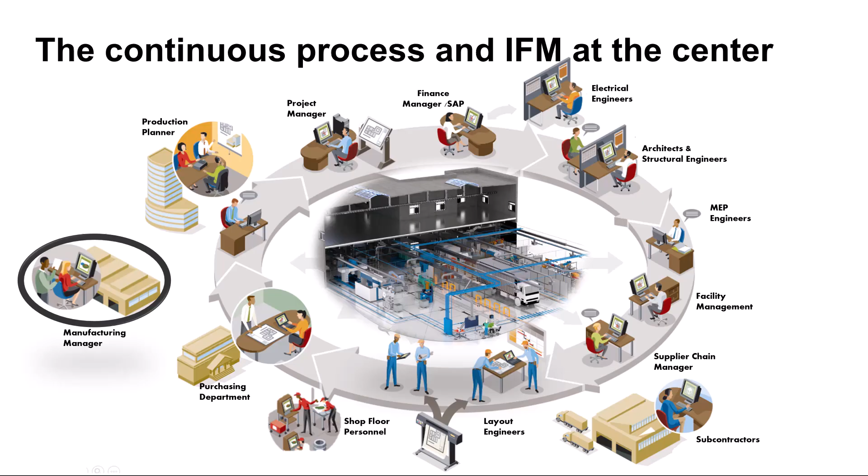Most companies work in functional silos. Little attention is paid to the company-wide flow of information. The information is hard to find, inconsistent, often outdated, and difficult to interpret. This leads to errors, delays, and inefficiencies. And most companies do not even realize how many layers of redundancy they have built into their business-as-usual processes.

In fact, Forrester research reported that we are using on average 45 different apps or services every single day. But that data is siloed, and people spend about 12 hours a week just digging or searching for data. And we can do better, a lot better. So let's have a look at the goals we have.

Our goal for an intelligent 3D and BIM process of the integrated factory is to coordinate the wide variety of different disciplines and supply everyone with the latest data. Here we can see the production planning, media supply, ventilation, lighting, water, electricity, for example, and of course the building itself, designed in different solutions, different departments, or even companies.

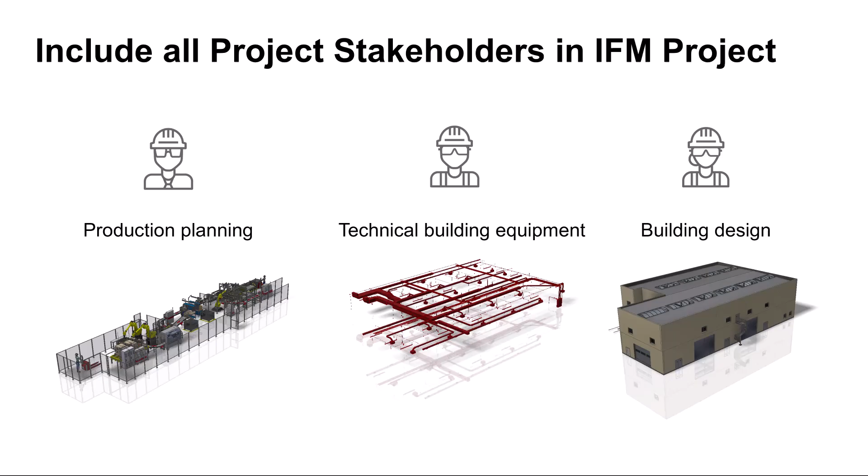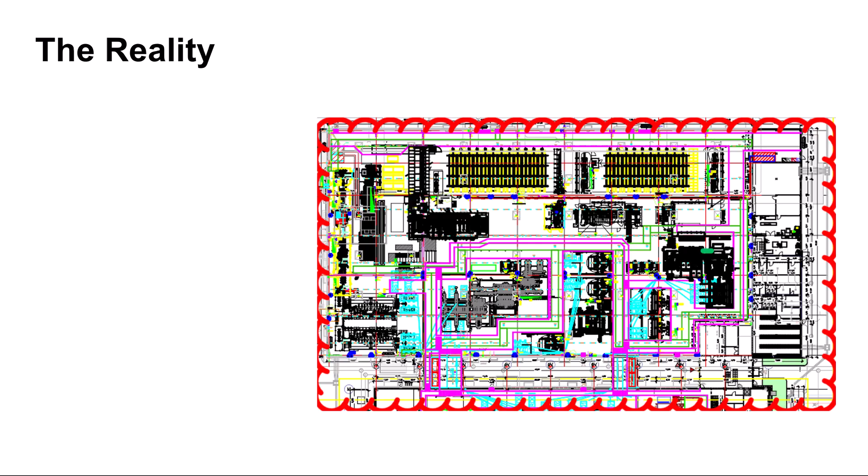But the reality in many companies is that layouts are still created in 2D. These layouts are usually readable only by professionals with a lot of experience and are error-prone because the third dimension is not included. All accompanying documents, such as Word, Excel, PDF, or handwritten documents, are distributed by mail.

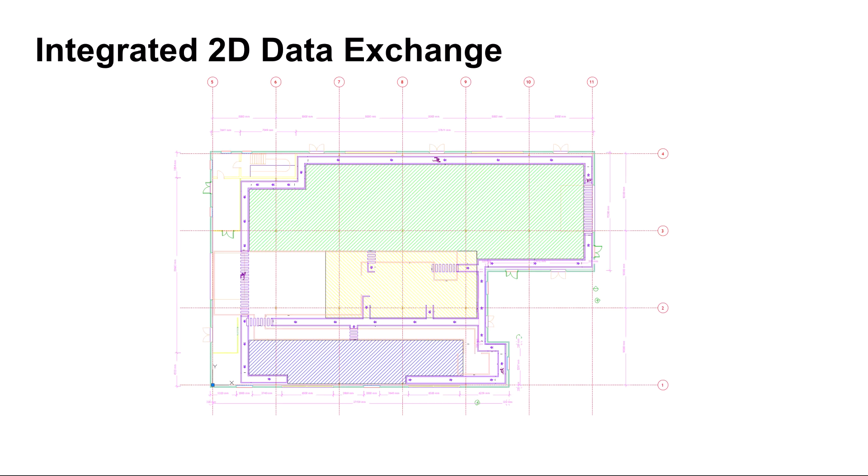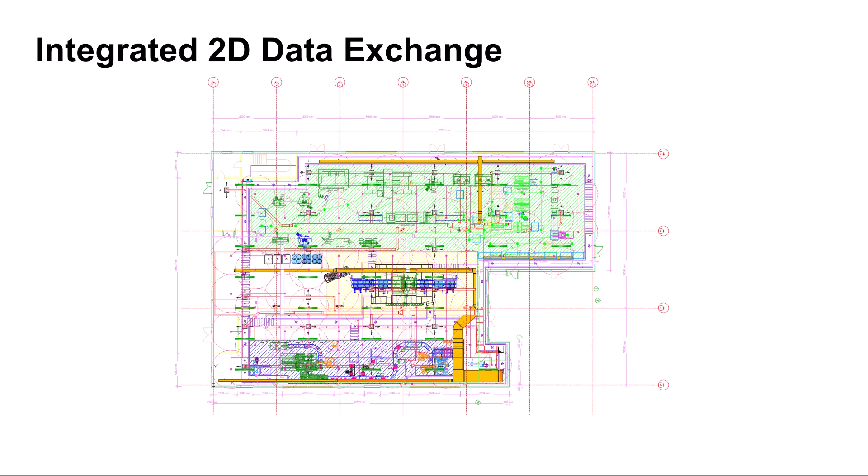And of course, we do see a data exchange here as well, with different layers, linked files, and many copies with different standards of the 2D floor plan of the building, the desired production area, the layout of the production itself, and finally the MEP design. This certainly results in a complete layout. However, the level of information and readability is limited.

So the goal is to elevate these traditional processes to the next level and beyond. As a first step, a building floor plan is certainly a good first orientation. The production areas as well as the media supply area can be represented as a 3D construction space. In this example, this is created in Revit and linked in Inventor.

The layout planners then fill the assigned areas with machines and the production layout. The model is completed with the media supply and the building from Revit.

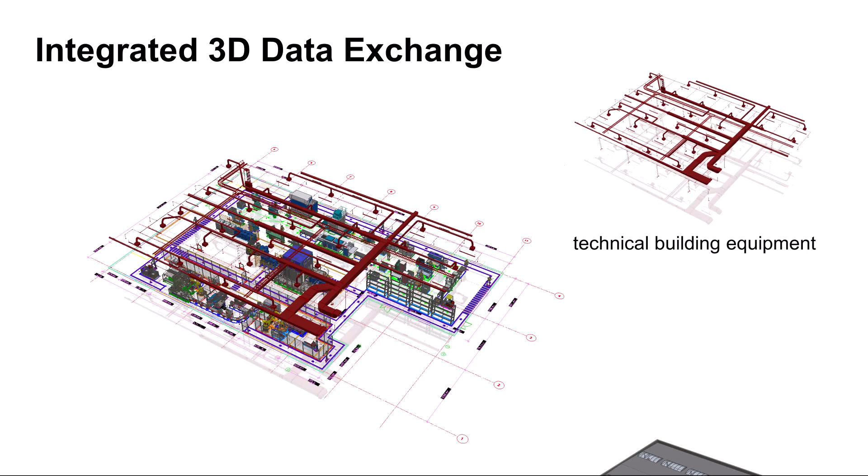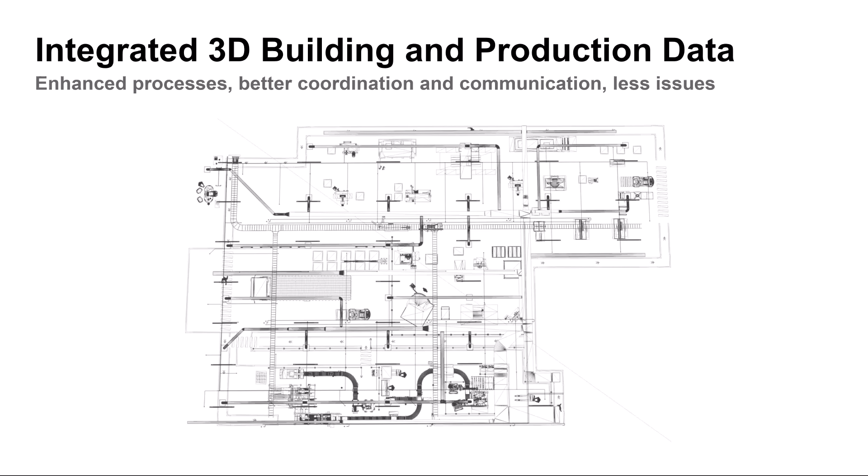This integrated 3D building and production data workflow enhances all processes for the digital factory, allows a much more intelligent coordination and communication, resulting in less issues, less time invested, and cost.

However, our goal is to use the best Autodesk solutions to solve all requirements and intelligently combine different Autodesk solutions with the least amount of data loss and the latest data exchange, collaboration and communication tools. Many products are bundled in the AEC and PDMC collections, so it's easy and affordable for our customers to use the same methods and workflows.

So now let's have a look at the Factory Design Utilities, just as a short overview, because in this case we want to concentrate on the AEC part of the digital factory, but at least I want to show what the Factory Design Utilities are. With the Factory Design Utilities, it is possible to create the layout in 2D or in 3D. And this is unique in the market.

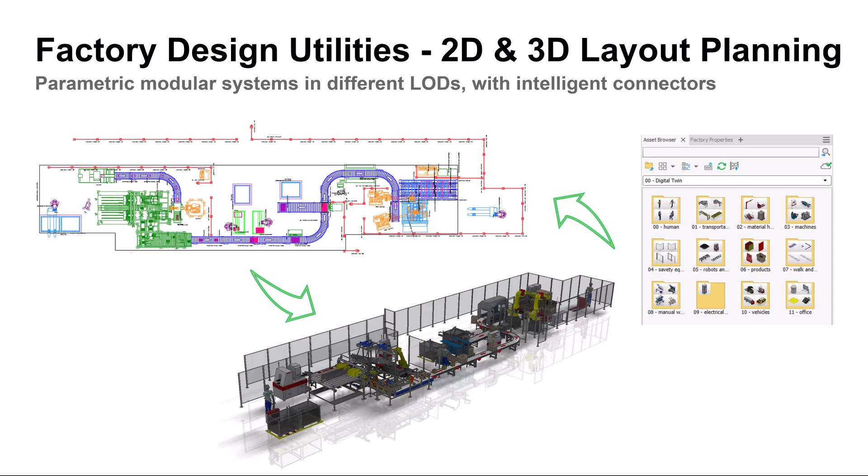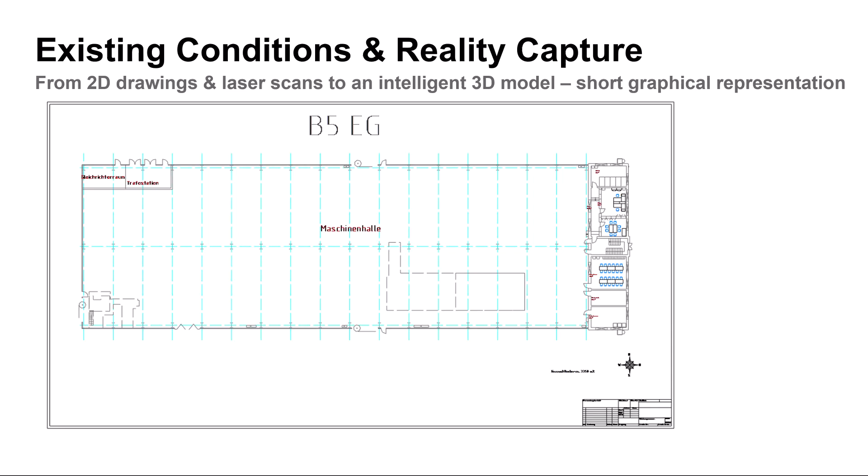So now let's have a look at the existing conditions and reality capture. In this case, we have a 2D plan, a DWG drawing, as a first step. We can use the lines and layers of that 2D plan to create intelligent grids and also walls and facades and so on, so that we can create the first floor plans, for example. But we don't have any information about the height or any other information.

But in this case, we just had a laser scan. So as you can see here, we don't really have the height, but with a laser scan, even though it doesn't have a good quality, it's just one single laser scan, at least we can see the height, the roof, the facades and so on. And that's what we can use to really create the whole 3D model in here.

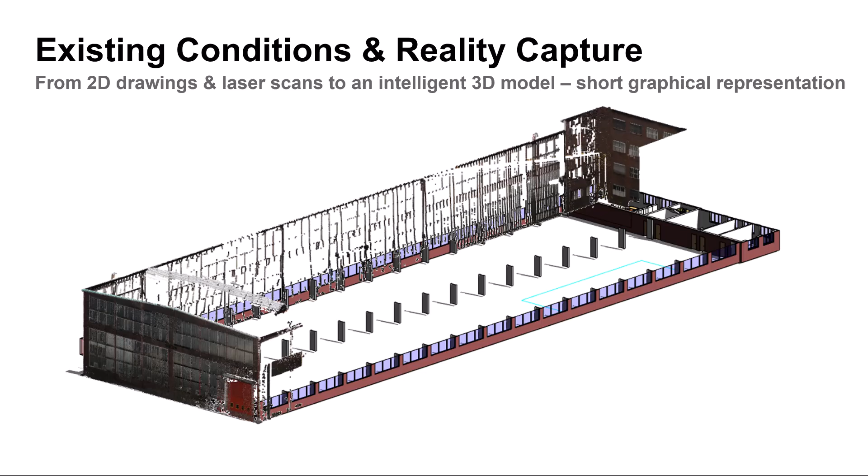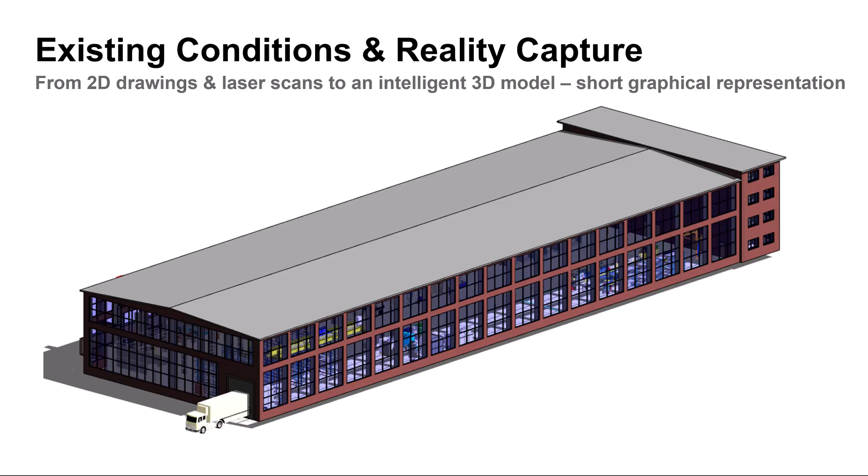And then we can fill it with more and more information, maybe use some other laser scans, maybe we have some other data that we can use to create even the MEP elements, and then we create the roof, and also we put the layout planning inside. So this is just a short graphical representation of how it could be done. So how do we integrate that building now into the different workflows, also into the production processes? There are different ways of doing it.

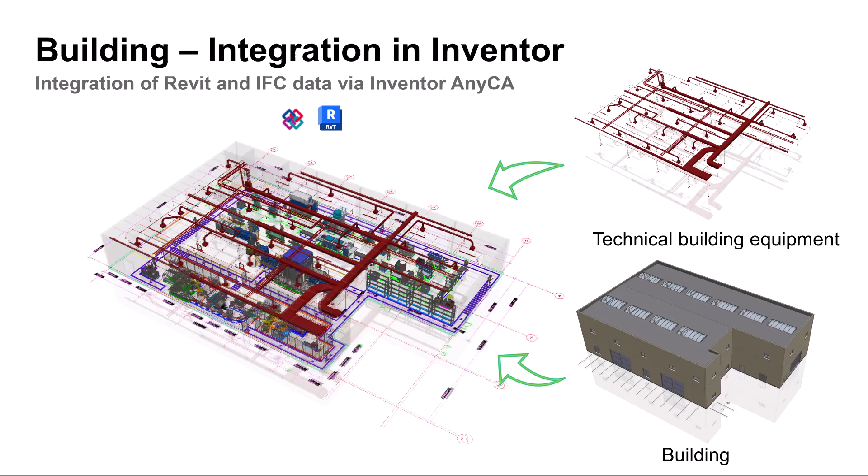The integration of building data is becoming increasingly important. It allows collisions to be detected in advance before they generate high cost on the construction site. Building data can be integrated in Inventor with Inventor AnyCAD, linking a Revit or IFC file, for example. In this case, we see the production planning, and we have the technical building equipment from Revit. So we just import that. We can link it with AnyCAD to Inventor, the technical building equipment and also the building, and then

have that building integrated. Here you can see an example with construction spaces modeled in Revit and imported or linked in Inventor. Those spaces can now be used not only to insert production machines inside available areas, but also to see limitations like available heights in a three-dimensional space out of the building. So working with a construction space can not only replace the classic DWG floor plan, it adds BIM workflows and advantages to it.

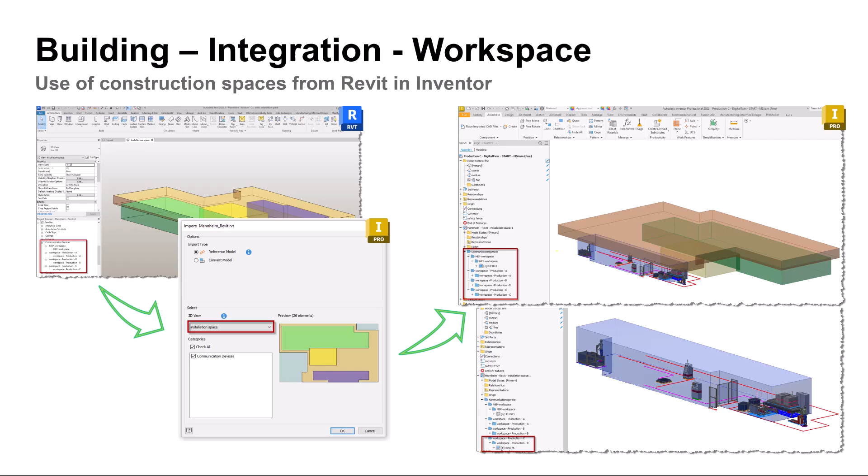In order to achieve the best possible coordination of the building, MEP objects and production layout, it is necessary to coordinate the common origin of the project. The easiest way is to use the Revit origin that can be read by Inventor and will be aligned for all further workflows. With this approach, collisions can be detected and eliminated at an early stage. In this case, you see just the spaces that we have, but of course it can be coordinated further. When we have the whole MEP elements, you can see the collision here again.

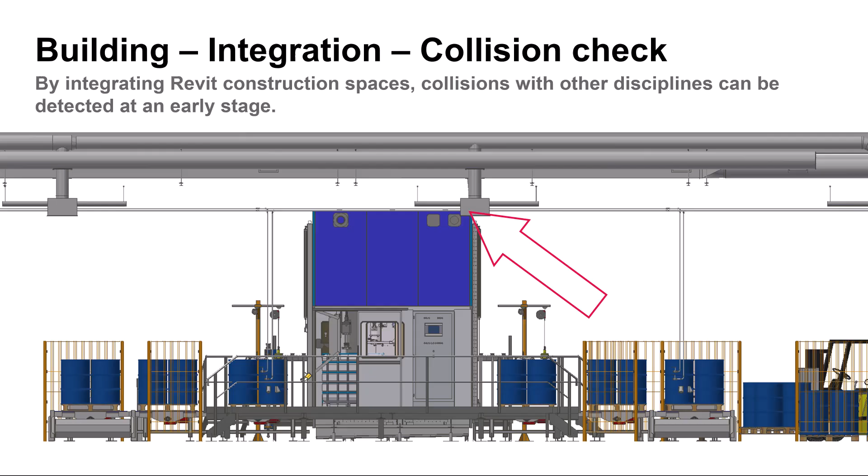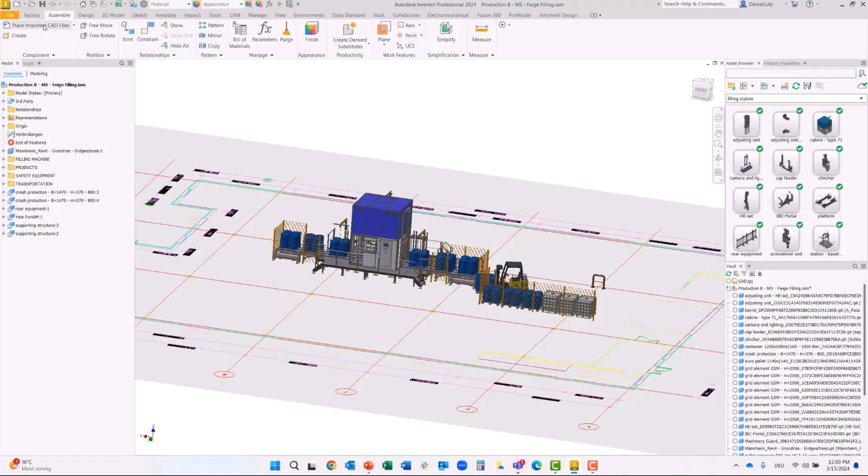So let's have a look at this video to see that live. In Revit, these construction spaces have been defined for each project stakeholder for project coordination. In a separate view, only the build spaces are visible to simplify integration with Inventor. In Inventor, we can use AnyCAD for Revit to load this view and place it at the origin.

Now you can clearly see that the cabin of the machine collides with the installation space of the MEP model, what we could see in the slide before as well.

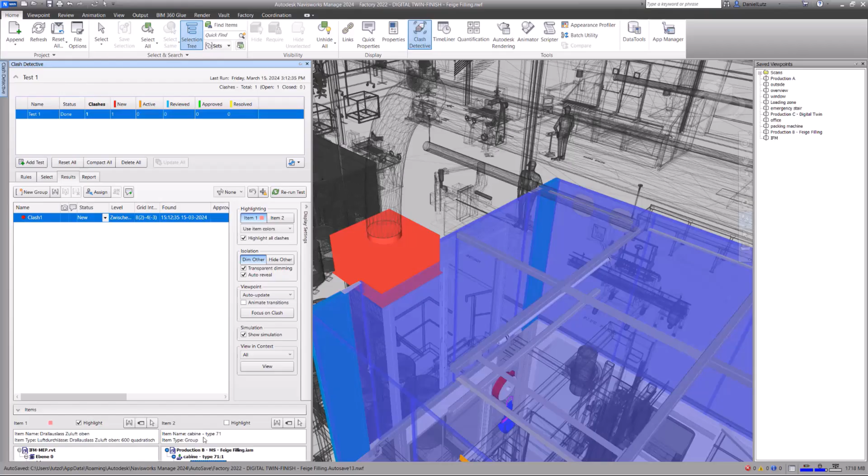And before talking about cloud collaboration, we don't want to forget about our coordination solution, Navisworks, that can perfectly integrate all of the above created objects and projects. So in Navisworks, you can easily do a walkaround, a walkthrough, and it helps to speed up the bidding and planning processes. But of course, we have the collision detection, and you can see we just found the collision with the machine and with the MEP elements in here.

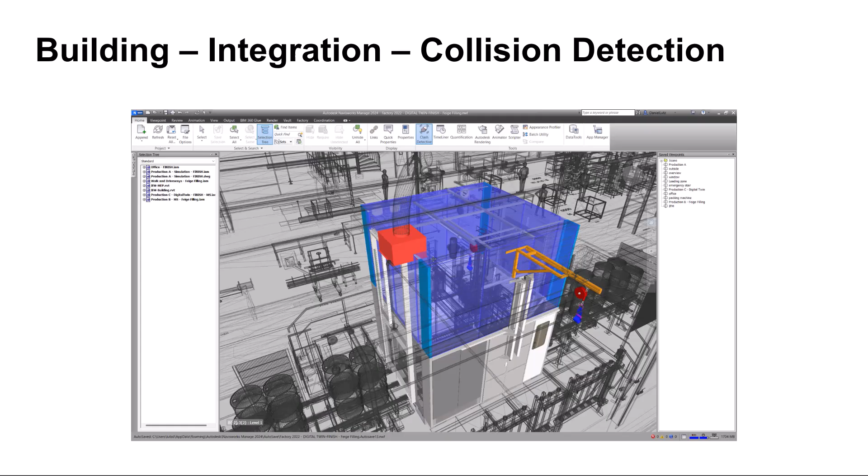Now let's have a look at the coordination and collaboration for digital factories within the cloud. In this case, we have a look at the production planning view first. So in the production planning, we want to integrate the technical building equipment and the building design. In that case, we just have an early integration of the building data into the production planning.

So we just upload the Revit files into the Construction Cloud, and from the Construction Cloud, those files can be read by Inventor or AutoCAD. And that is an easy way of using the Construction Cloud and sharing the same data in the Construction Cloud.

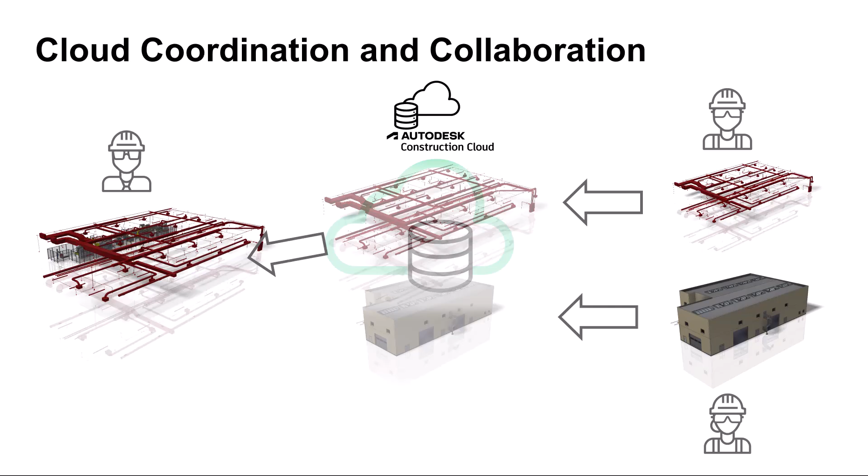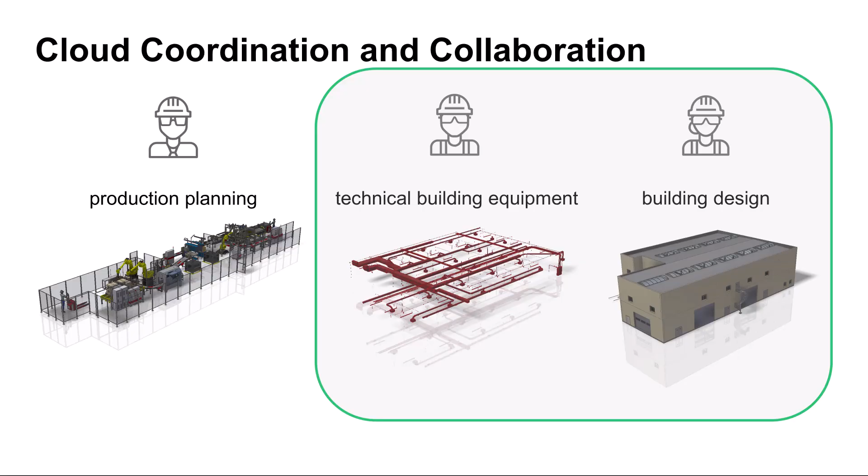On the other hand, we have a look at the building planning. So the building planning needs to integrate the production planning. So how can this be done? In this case, there's possibilities with Inventor or FDU for Inventor to export a Revit file from Inventor and then to publish that Revit file into the Construction Cloud. So in Revit, we can read that published Revit file out of Inventor and can use it in the Revit project itself to coordinate, for example, the MEP installations and so on.

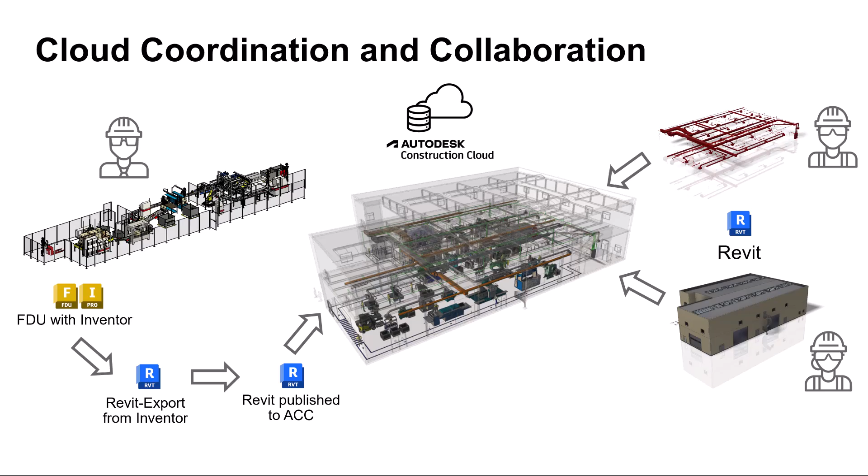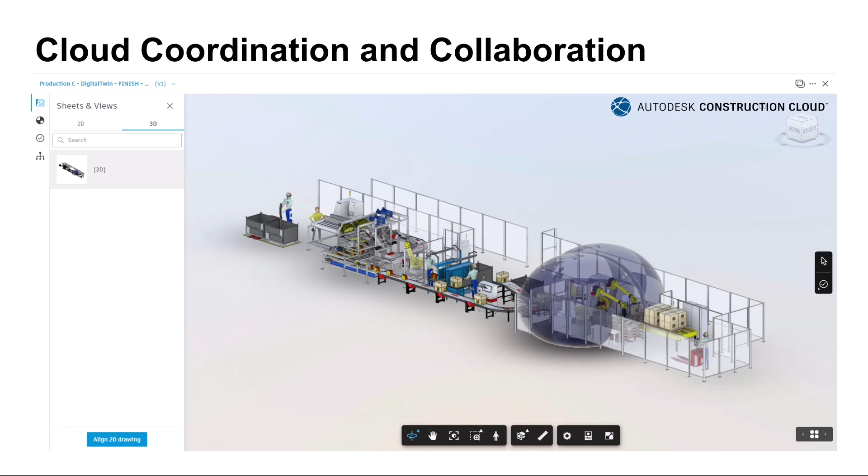Here we have a look at a project out of Inventor uploaded as a Revit project into the cloud. And these projects can now be linked into Revit and can be updated because it's just linked. And then, as you can see here as well, we also have the possibility to use those files for coordination processes. So like we've seen in Inventor, like we've seen in Navisworks, we have possibilities to do collision detection as well here in the cloud with all those different files.

Now let's have a look at another way of exchanging data. We don't want to exchange files, we want to exchange data only. And for that we have developed the Autodesk Data Exchange. With the Autodesk Data Exchange there's a possibility of exactly not sharing files, but sharing data, metadata only, so objects only, for example. So there are different connectors for a lot of different solutions, and not only Autodesk solutions. As you can see here, there's IFC, there's Grasshopper, there's Rhino, and a lot of different other solutions where connectors are available to exchange data.

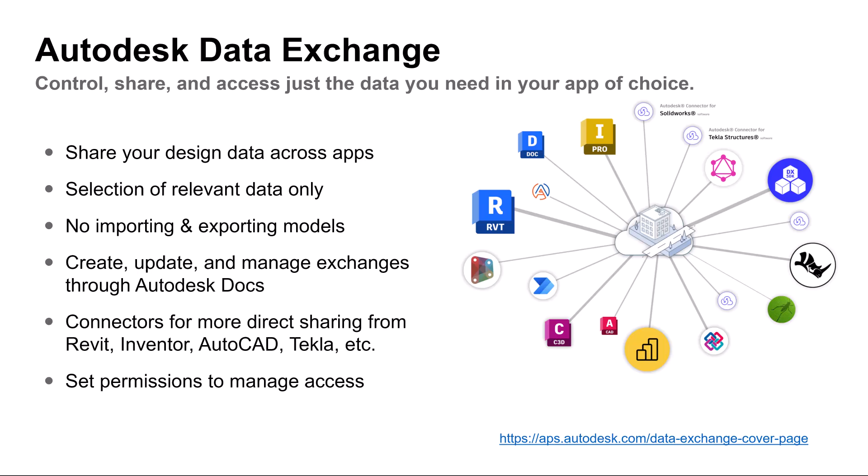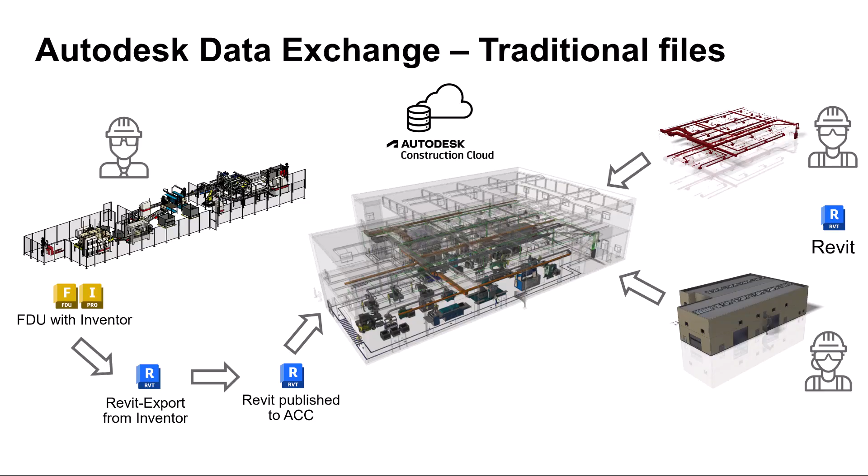How does it look like? We've seen the way of using Inventor, exporting the Revit file, publishing the Revit file to the cloud before, and the new way is that we just use the granular data in this case and not the files. So we just use a different view inside of Inventor and use the data exchange to send this to the cloud. And we can do the same for Revit. And both views can be read in the different solutions then, without the need of thinking about a file that we need to export, like DWG, IFC, or whatever. We just exchange the data.

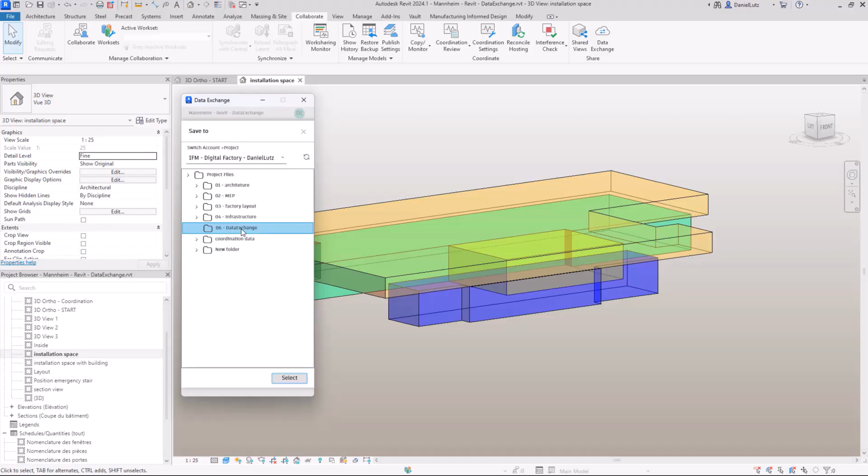And now let's have a look at how this could look like. So in a new factory, the general contractor defines the construction spaces for the required production lines and the media supply, like we've seen this before. For this purpose, an additional 3D view is created in Revit, in which only the construction spaces are displayed. Using the data exchange, this view is uploaded to the Construction Cloud.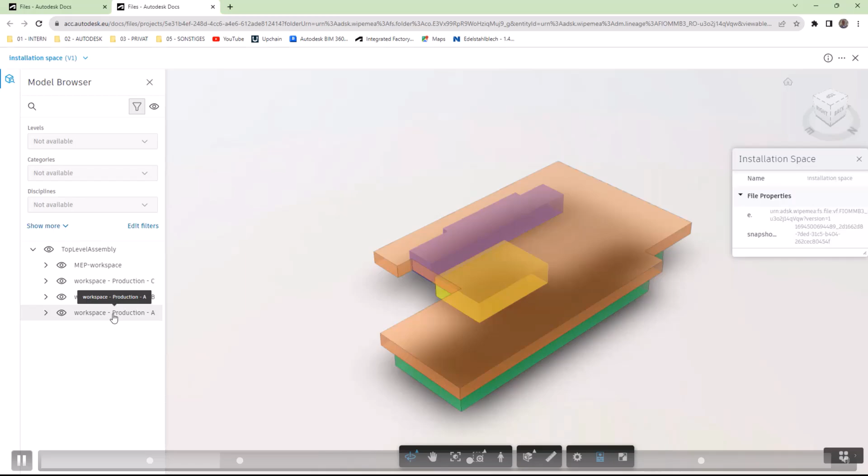The data exchange can now be opened in the Construction Cloud directly from Revit. All properties and a search are available there. Now the layout planner of production A can call this data exchange from ACC, check it via the preview and insert it directly into Inventor. The data exchange is automatically inserted on the 0 point. Thus the correct location is always guaranteed.

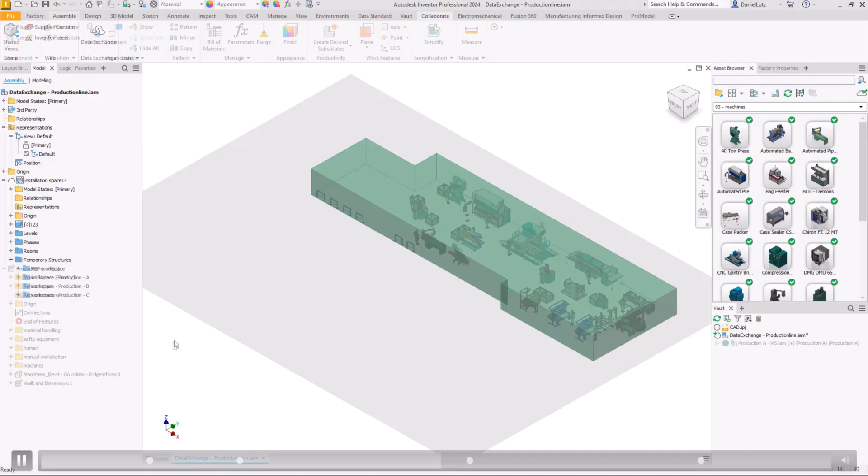The data exchange takes over the model structure from Revit. This allows the layout planner to hide the construction spaces that are not required. The layout planner can now plan the required production line based on the installation space.

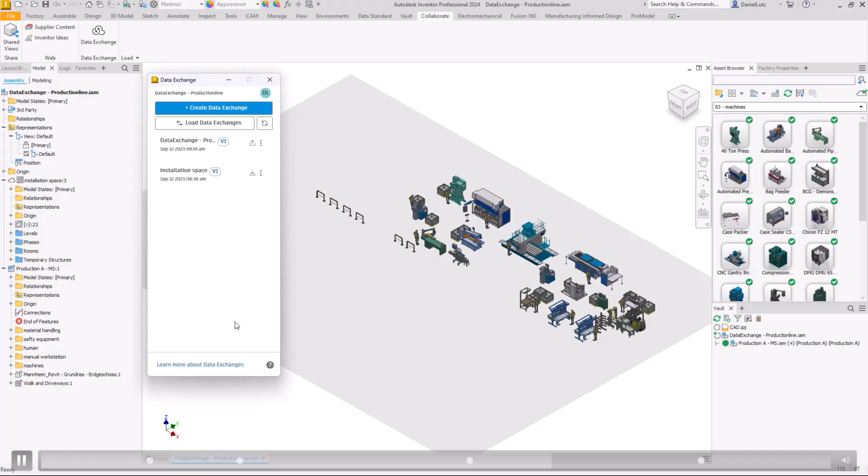After completing the production line, the layout planner also creates the data exchange from Inventor in order to hand over the production line to the general planner. The data exchange can also be opened directly from Inventor to ACC. And the data structure from Inventor is also available.

In the last step, the general contractor exchanges the construction space for the detailed production line by inserting the data exchange from Inventor into Revit and hiding the construction spaces.

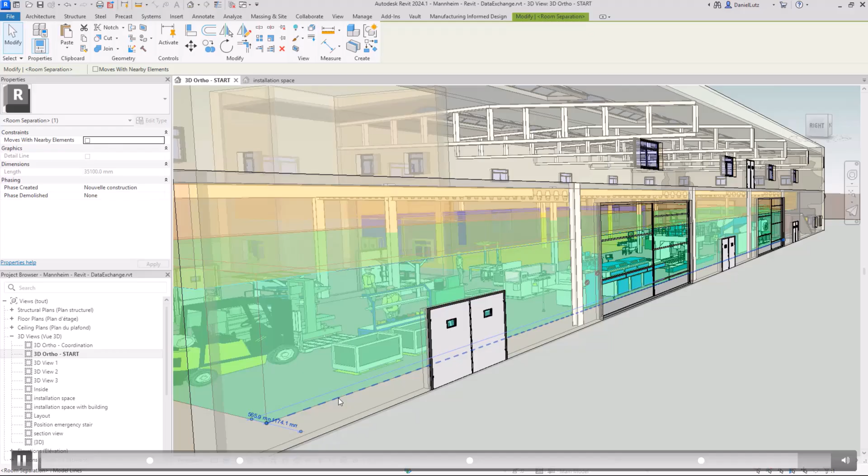Let's have a look at Autodesk Informed Design now. It is similar to Autodesk Data Exchange, but the difference is that here we don't want to be open to everybody. We want to really have a high quality data exchange between Inventor and Revit, but still with granular data and no files included. So how does it work?

But first, imagine there's different products that you need in a building project. For example, a balcony that you can see here. It could be windows, it could be doors, it could be any MEP objects, for example, on a rooftop, whatever. There's a lot of different elements that need to be manufactured first, and that manufacturing is being modeled and developed in Inventor. After Inventor, you want to send over the model to the building designer, so to Revit.

But it should be intelligent. You want to have all the parameters available to adjust it to the size that you need for your project. And after you have selected the different sizes that you need, you want to send the final selection and the final sizes, the final products back to the factory so that fabrication details can be created and it can be manufactured. This is the workflow that we wanted to create with Informed Design.

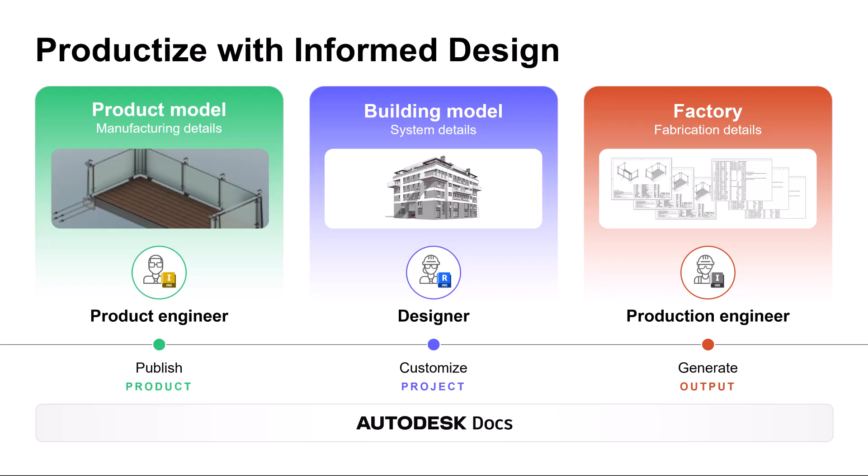Let's have a look at Informed Design with an example. It's not the balcony, but it's a staircase. An escape staircase detailed in Inventor and used as a parametric family in Revit. So we start in Inventor. To simplify the data exchange with the architect, the emergency staircase contains different model states, allowing simplified models to be exchanged with improved performance. The designs offered are created in Inventor with the help of iLogic to prevent special solutions.

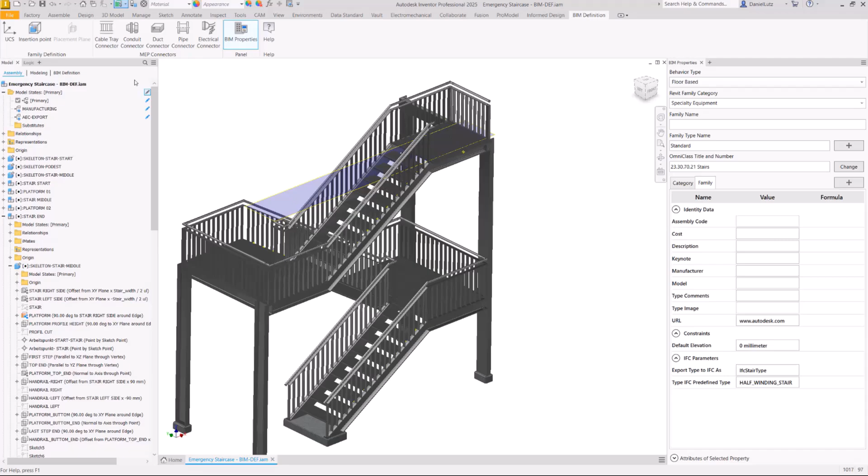With the BIM definition tool, the dataset can be enriched with all the necessary properties that can be read afterwards in Revit. So we start with the insert behavior in Revit. In this case, we use floor-based. It means that the staircase can only be placed with the upper landing on a floor slab. And even the insertion point can be defined.

The next step is that we have a look at the Revit category, and we define that. We define the Revit family name, the family type, and OmniClasses. The family can then be defined beforehand with iLogic so that a unique description is available.

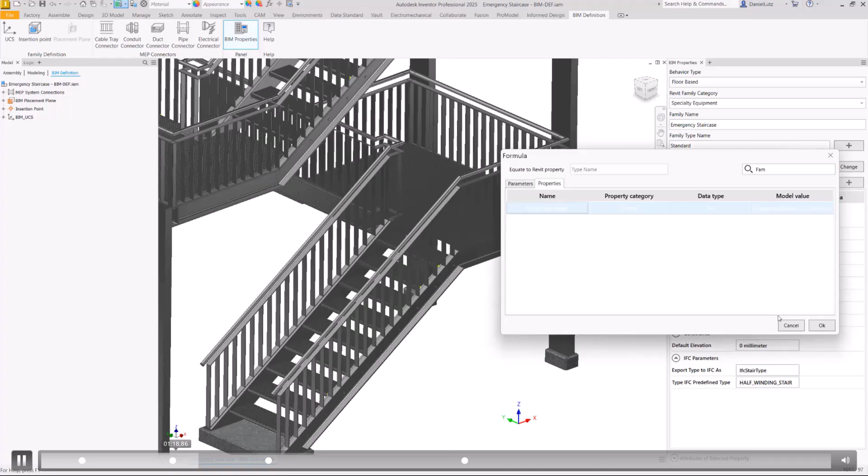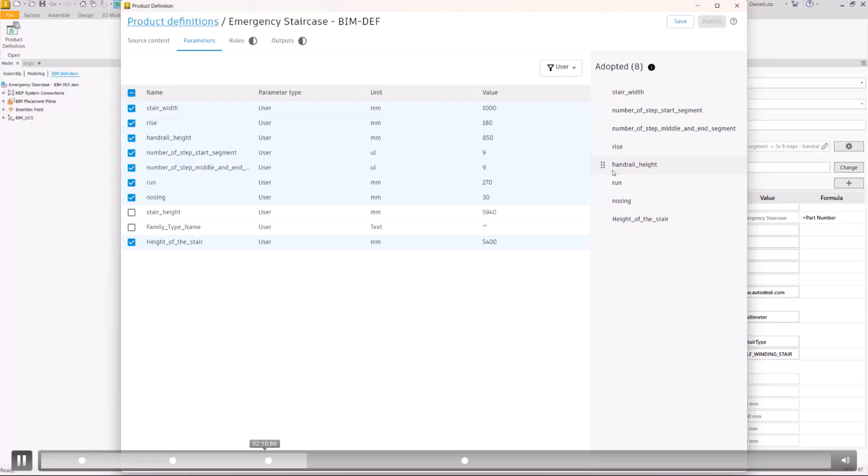Now we can start the publishing in Inventor, and we just search for the right project, and we define the output sources. We define the different parameters that we want to exchange, that we want to have access to, that we want to read afterwards in Revit. And now they can be defined much more. There can be calculations and so on, but I will jump here a little bit further.

So these are the outputs that we need afterwards. We want to have the AEC output, so we want to have PDFs, for example. We want to have SAT files. We want to have Excel sheets of the bill of material and so on. So that's what we all define now. And now we just go to the project in the Construction Cloud, and we just define where we want to save it to. So there's a stairs folder in the Construction Cloud itself, and we just save it to there.

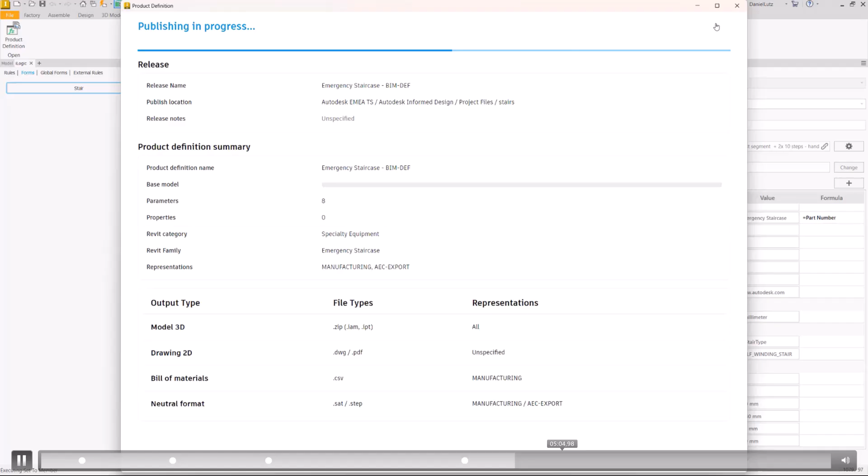The next step is we go to Revit, and inside of Revit we start the informed design tool as well. And here we find exactly the stairs that we've just defined. And you can see all the parameters that we defined before in Inventor are available. So now I can select the stairs with the parameters I need for my project.

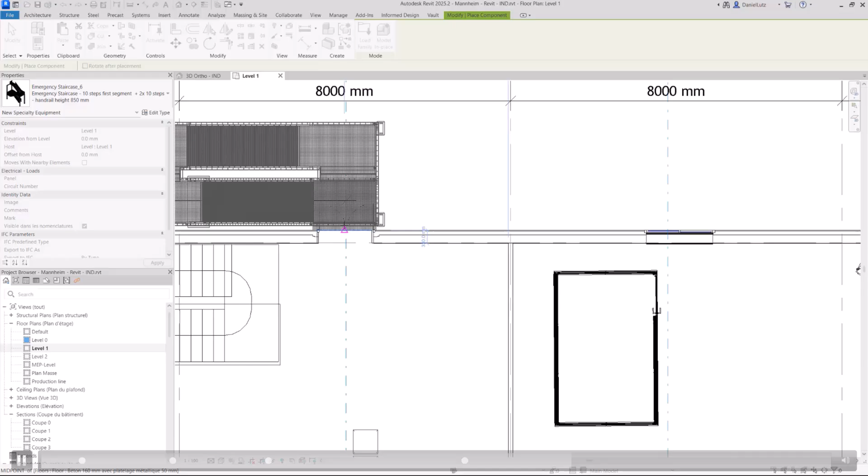As we've seen before, it's floor plan based, or floor based, and so we just define the insertion point and we just insert the stairs in here. What you can see here now is that we had the wrong parameters. The stairs are a bit too high.

So what we can do now, we just go back to informed design and we just change the height that we need. So it's just another product with another height, and we could calculate that before, but we just say we want to replace it by this one that was generated already, and now the height of the stair is perfectly fine. This is what we wanted.

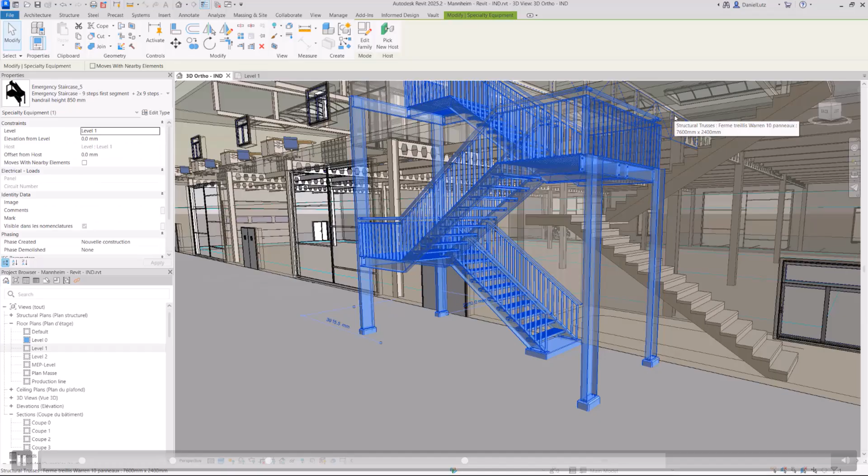So it is the parameters that we can change, but not inside of Revit. You can see the parameters here in Revit as well, but those are read-only. So if we change the dimensions in here, nothing happens. If we want to change it, we just go back to the informed design product, change the parameters and insert it back.

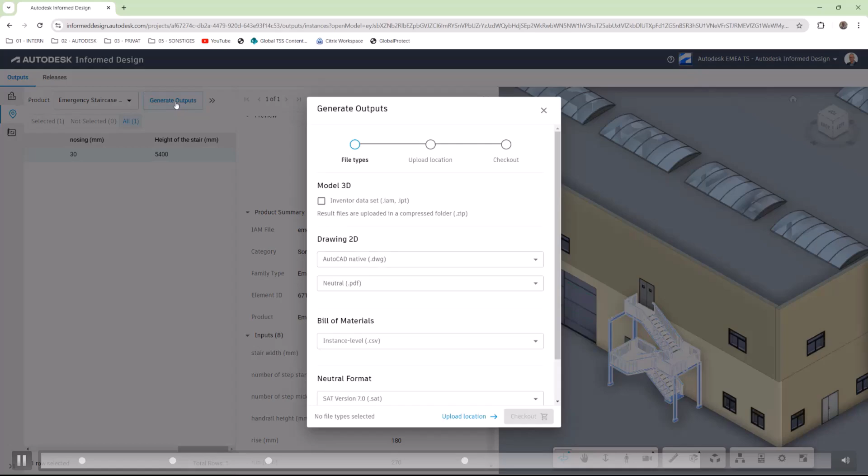And here now you can see, after we have defined the right stairs, we just save it back to the Construction Cloud. And from here we go to informed design again, and we generate the outputs. And the outputs we want to generate are Excel sheets, PDFs, so all the construction drawings that we need to have in here.

So if I go here, all those construction documents are in the Construction Cloud now, and you can see these are the detailed bill of materials and all the different Excel sheets that we need, and the detailed fabrication sheets or views and PDFs as well.

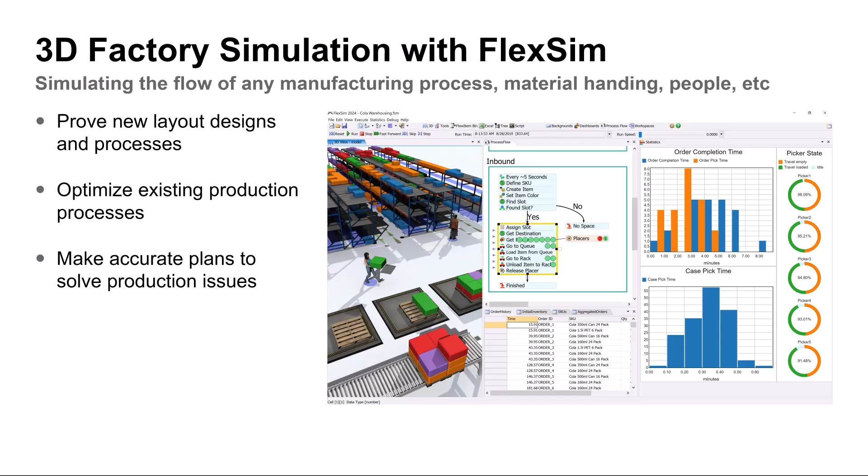Let's have a look at simulations now. With FlexSim, you have the possibility to simulate the flow of any manufacturing process, material handling or people, to prove new layout designs and processes, to optimize existing production processes, and also to make accurate plans to solve production issues. Let's have a look at one example.

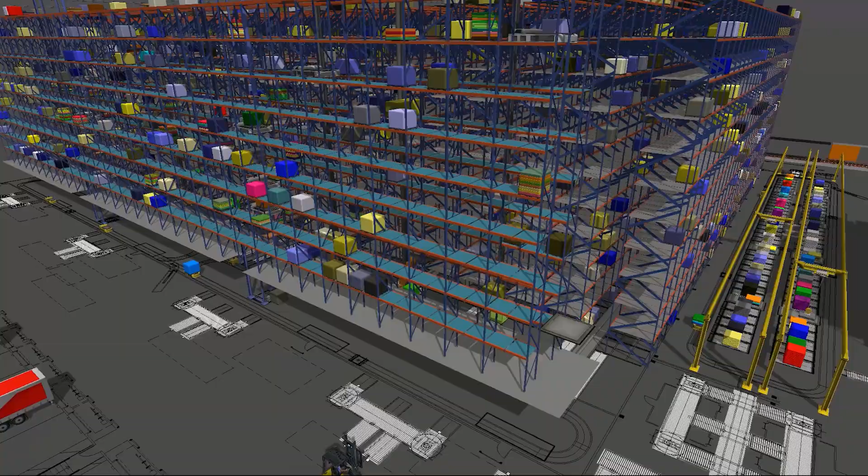In this example of a digital factory, you can analyze the data in real time to see where you have bottlenecks and productivity gaps. Because if you don't have the perfect balance of utilization for every machine, you're wasting resources and money. Through simulation, you can evaluate emissions for sustainability or measure energy consumption for profitability, allowing you to uncover problems before they occur.

For example, if you want to avoid mounting a €4 million machine to the floor, only to move it later, along with everything else. There are different add-ins available for Autodesk Construction Cloud, for Revit and Inventor, so you can simulate processes and people of the building information model of your factory in the proper solution.

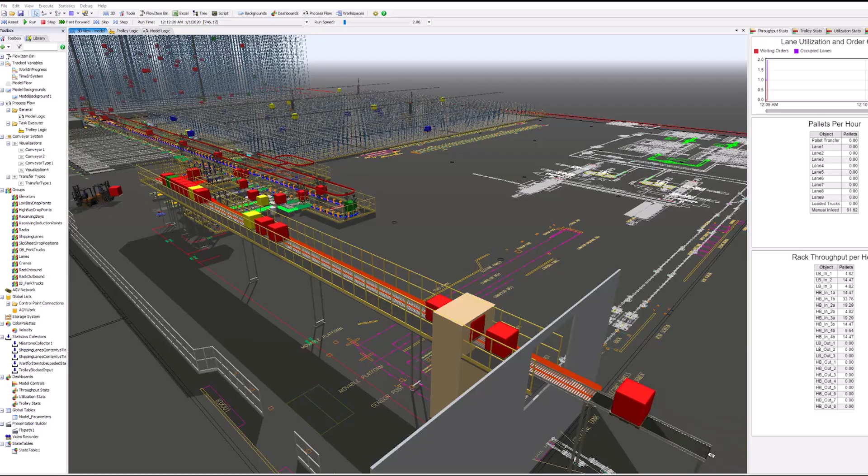Let's have a look at the infrastructure for digital factories now, because every digital factory needs to be placed in the right environment, and there's a lot of other things for logistic planning and so on that need to be taken into account. Let's have a look at an infrastructure example of a digital factory for the placement, the site evaluation and logistics planning with comprehensive analysis.

InfraWorks allows us to quickly place a factory on the desired terrain. Here we are helped by the model builder of InfraWorks. There we enter the address and get the corresponding map view. By drawing a rectangle, we define the desired terrain section and give the project a name.

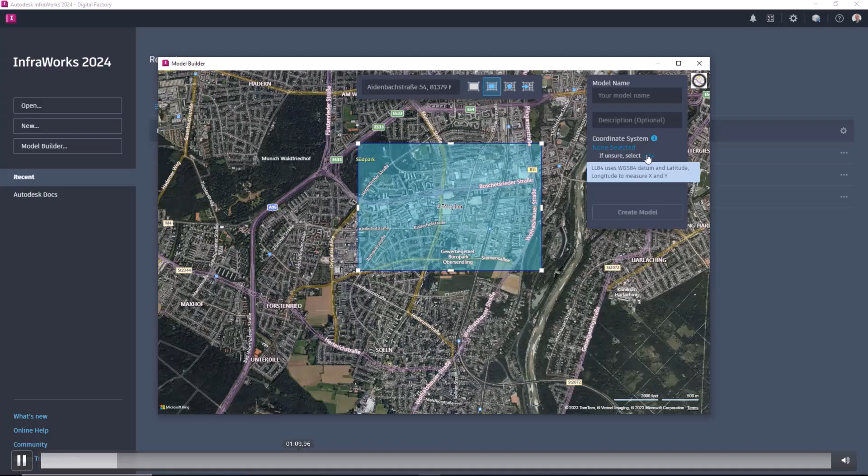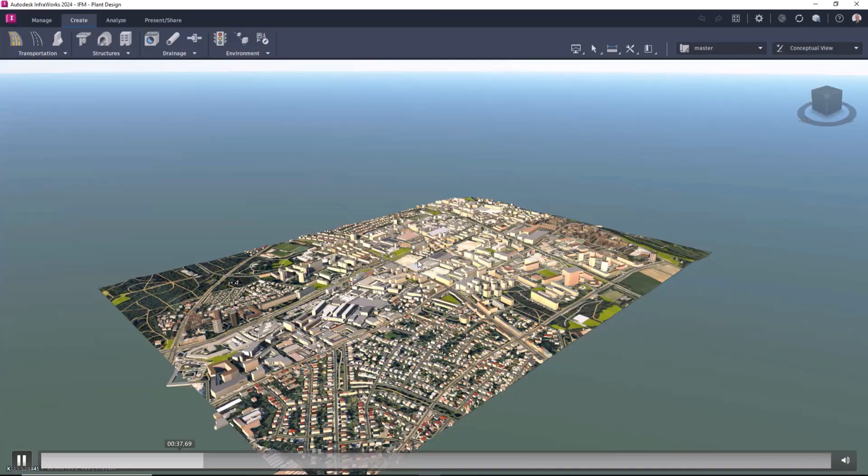A few minutes later, we receive an email notification that the model has been calculated. Now we can navigate to the desired terrain and create a flat intersection surface in the first step. As styles, we can choose different pavements or other elements.

Using the data sources, we can now insert the building and place it interactively on the terrain. It can be a Revit file, but in this case it is a Navisworks file in FBX format, and then imported as data source. There's an associative link to the files, so they can be updated quickly.

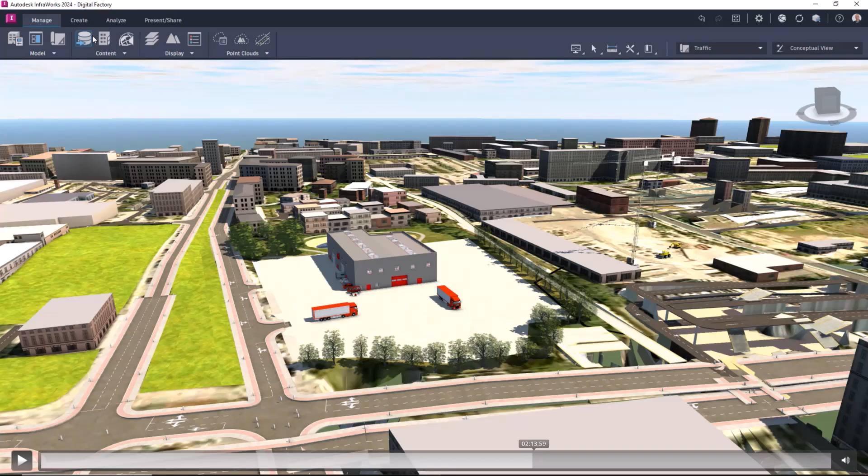Afterwards, there are different possibilities for analysis, like sun analysis throughout the day, wind analysis, and also water analysis, like flooding, as we can see in a second. As you can see here, we also defined green areas, roads, water areas, and now let's have a look at the flooding to evaluate the terrain accordingly.

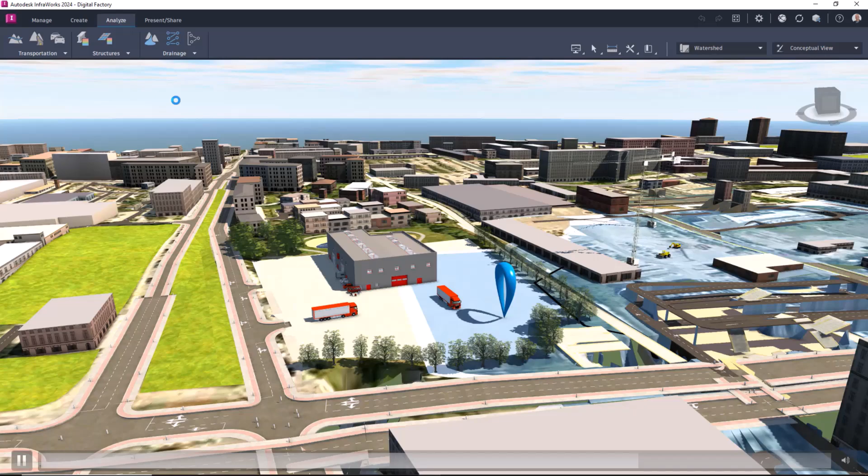A very important point can also be the traffic simulation around the site. It must be ensured that goods leave the factory just in time but also arrive. If this is not guaranteed at certain times, the logistics may have to be rethought. All these are possibilities to evaluate different sites in order to decide on the optimal location.

A visualization is not just a nice rendering. It can present final digital factories and processes to decision makers, owners and other stakeholders. But there are also ways of visualization that help every designer in the planning phase to avoid overlooked errors and reduce time and cost.

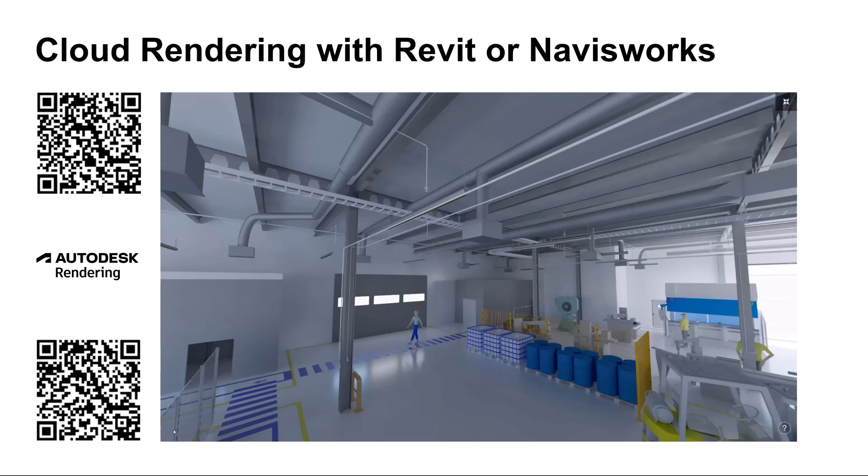Autodesk offers a number of ways to visualize data in projects. With cloud rendering from Revit or Navisworks, still images, but also panoramas, or even day and artificial light analysis can be rendered in the cloud with just a few clicks and in just a few seconds or minutes instead of hours. With 3ds Max or even VRED, photorealistic, high-end visualizations and animations can be created, as we can see in these images and video.

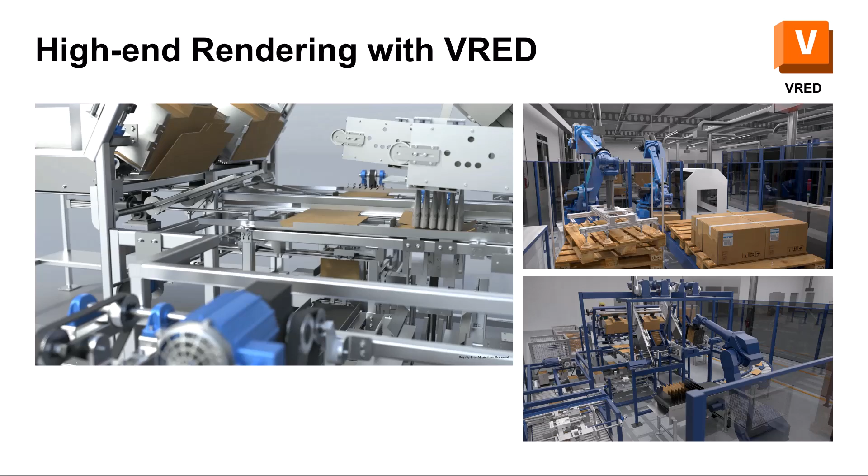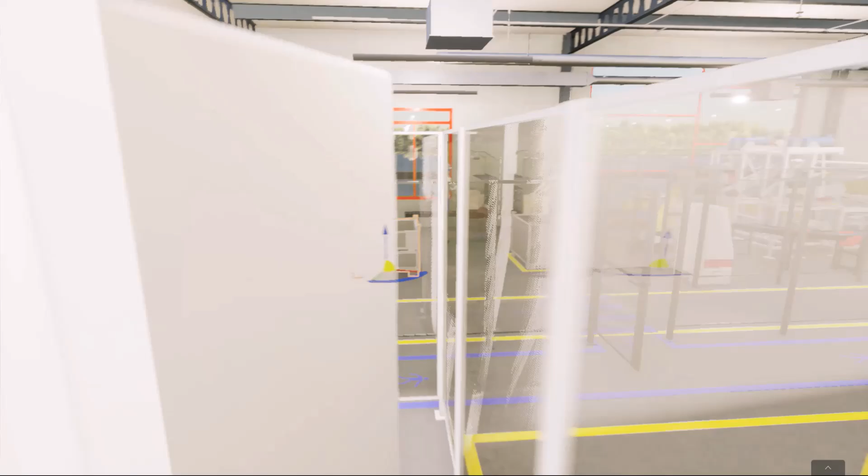The cooperation with Epic Games allows all Revit users to also use Twinmotion for Revit without any extra cost. With a direct plugin in Revit, the data can be transferred associatively to Twinmotion. In Twinmotion, you can use real-time rendering with high-end material textures and also the animation of machines, people, or cars. You even have the possibility to change the atmosphere, daytime, or even weather whenever you like, and snow will be covering your scenes.

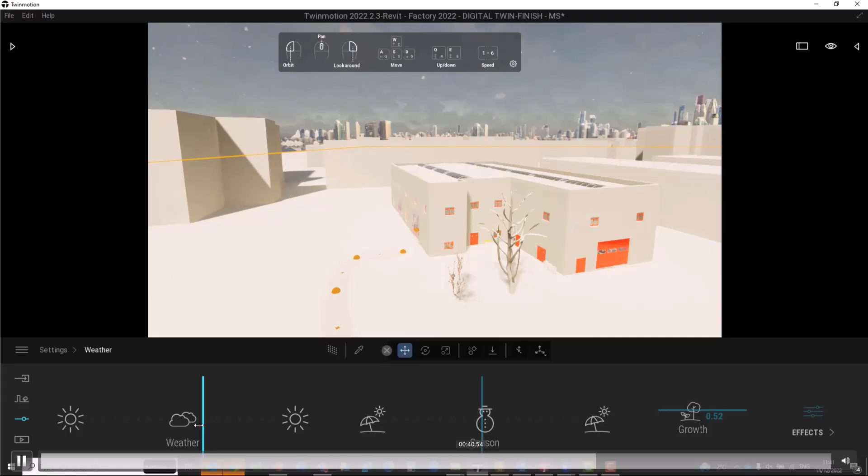With Workshop XR, we have another way of visualization. In this visualization, we are not looking at a photorealistic rendering, we're looking at a visualization within the planning phase. And in the planning phase, we want to improve the design accuracy, we want to streamline the collaboration, we want to find issues much faster, and also have faster decision making. So let's jump into the product and have a look.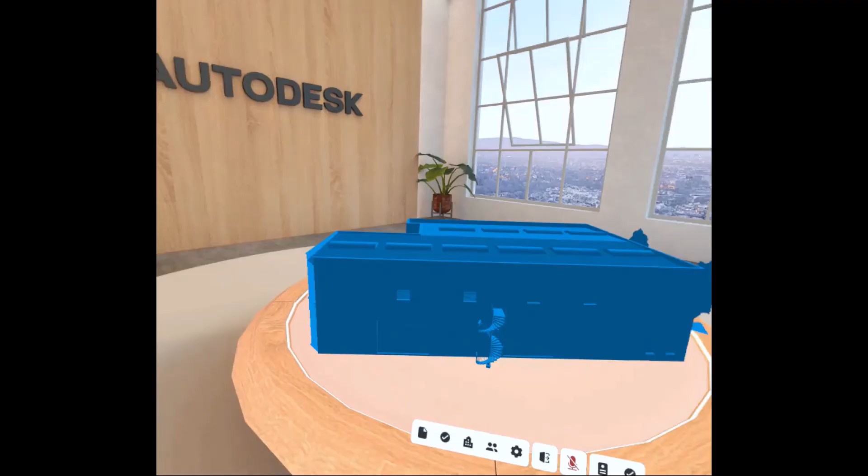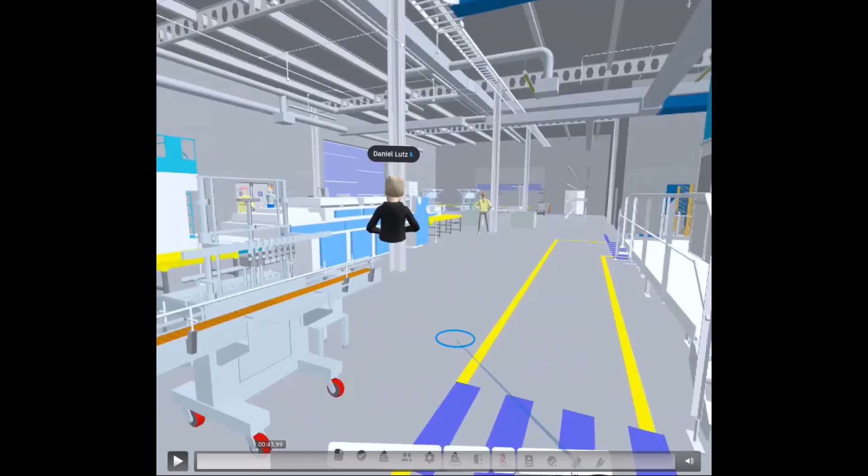So wherever you are in the world, you can just meet anybody, and you're not looking at a screen, you are inside the model. In this case, we're standing in front of the model, and we can have a look at that. We can zoom in, or we can scale it, and even hide specific layers or categories. After we have seen the whole project itself, we jump into the project and examine it inside. There are different ways of examining it.

For example, we can have a look at BIM properties or any properties of a file that you imported in here, because we have many different file formats that we can include, like Revit, IFC, DWG, Navisworks, and so on. In this case, you can see we just measured the distance. If the distance is not okay, you can create a new issue. This issue is synchronized right away with ACC, with Docs. So it is the same way of creating issues.

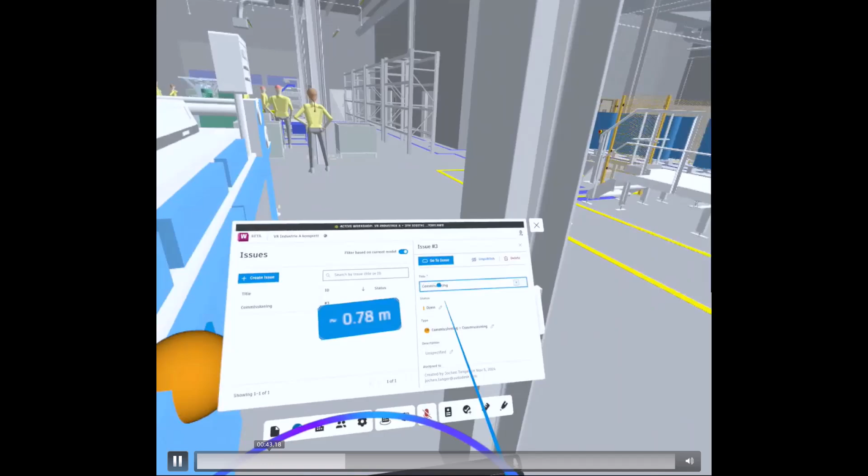So if I have an issue inside of Docs, I can jump into that issue in here and examine it in an immersive area. Like I said, it's not like looking at a screen, it's really jumping inside of a model. And customers say that it's much, much better. They find many more issues and they can take decisions much faster and easier, because they are really inside of that model and they can feel anything that they wouldn't see just in a 3D model.

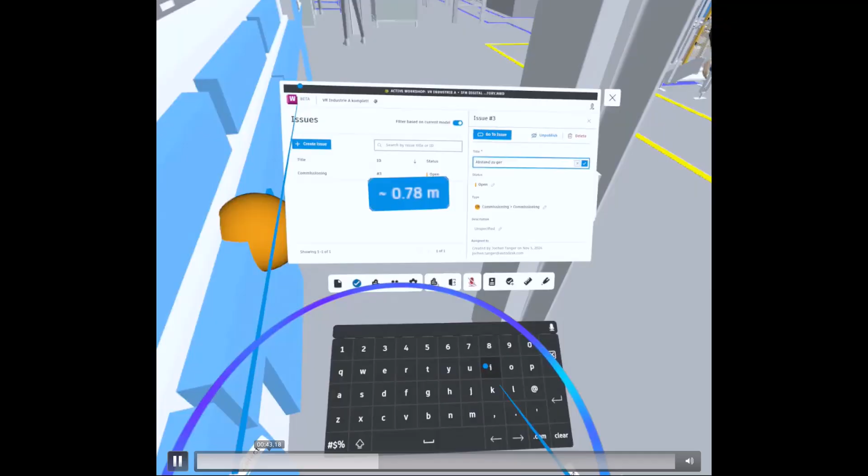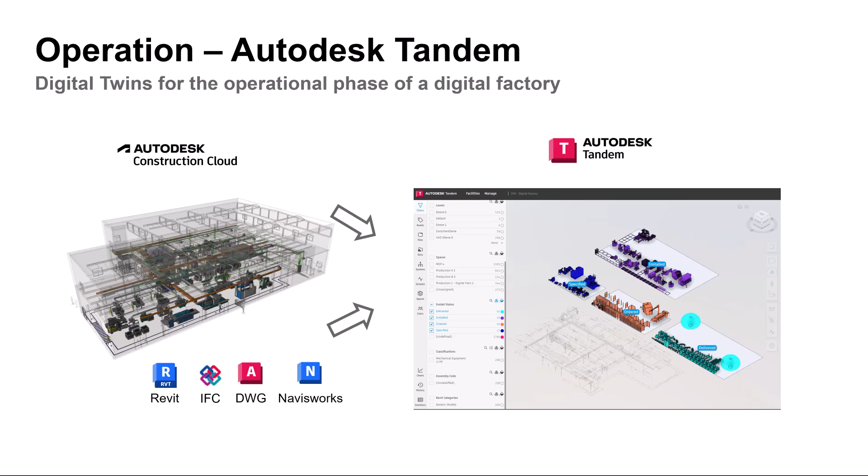Last but not least, I want to talk about the operational phase. The effort for a 3D factory model is also worthwhile after commissioning as a digital twin. The existing data can be used for operational workflows in Tandem. Assets can be enriched with additional properties and data. Sensors can be integrated for temperature, humidity, pressure, radiation, etc., which are displayed in the model via diagrams and heat maps. The data can be uploaded or even linked directly from ACC, accepting Revit files, IFC files, Navisworks files, and DWG projects.

Let's have a look at an example of Autodesk Tandem. In this case, we have a look at the digital factory that we've seen before already. And if I jump here, we have a look at the file formats that we can import or link directly from the ACC. And like I said, it is Revit files, IFC, DWG, or Navisworks files.

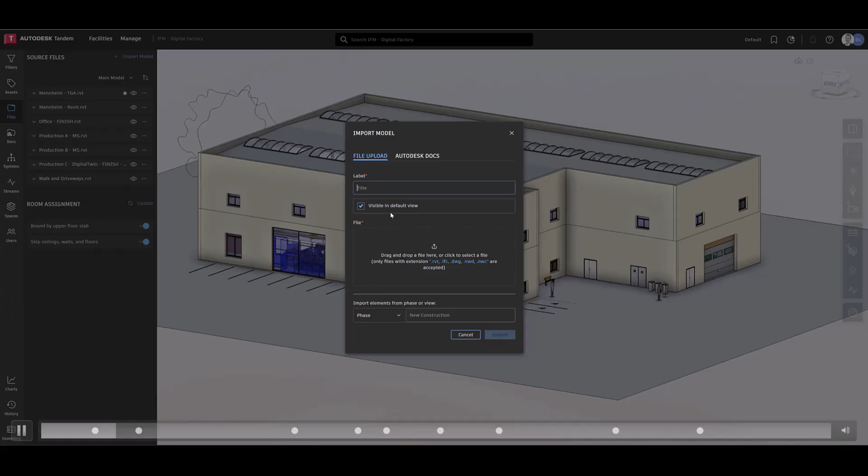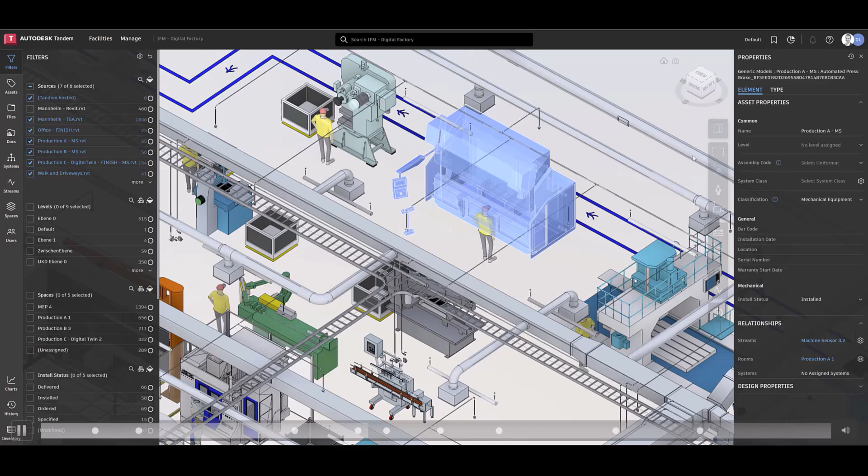The next part are the properties that we can see. So we have a look at one specific machine, and we look especially at the installation status of that. So we have all the properties inside here. We can add other properties like asset properties that haven't been there in the design phase, and then we can filter them. So in this case, you can see there's the installation status that we have, and now we can filter that down.

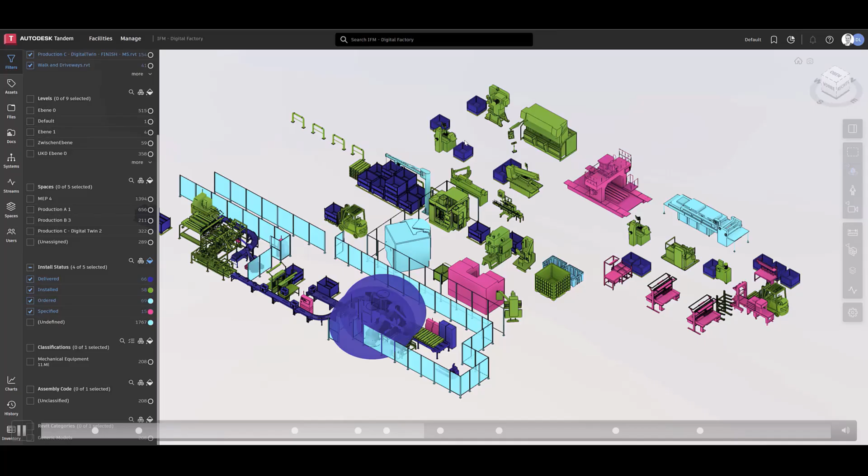So we filter it by different installation statuses in here. So these are all the machines that were specified, these are the machines that have been ordered, and so on. We can colorize them so that we can right away see the different status by color. And then we can have a look at the inventory list as well, to really see that and to define that. So we can specify that, we can add more asset information to that.

When was the installation date, for example? What is the warranty date? And so on. Any asset information that we want to add here, we can always do whenever we want to. We go a little bit further to group that now. So we want to have everything grouped by the installed date, for example, or installed status. So I can right away see which machines have been just delivered, which haven't been installed, and so on.

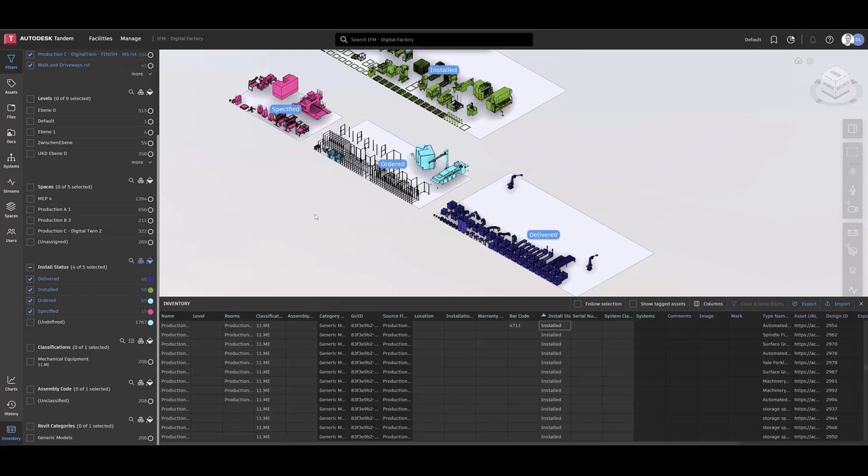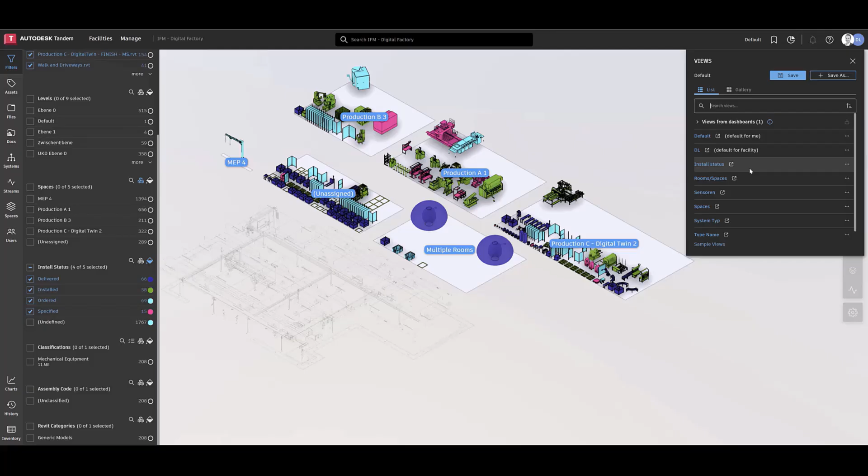And last but not least, we look at sensors. We look at the sensors that we add and that we can visualize in the digital factory. So the sensors, like I said before, can be temperature, humidity, pressure, radiation, whatever it is. Any sensor can be added and can be displayed in the model via diagrams and heat maps on the system or in the room. The sensors can be connected via webhooks to an HTTP endpoint specified by Tandem, with a history of saved data of 3 years to take proper decisions on historic experiences.

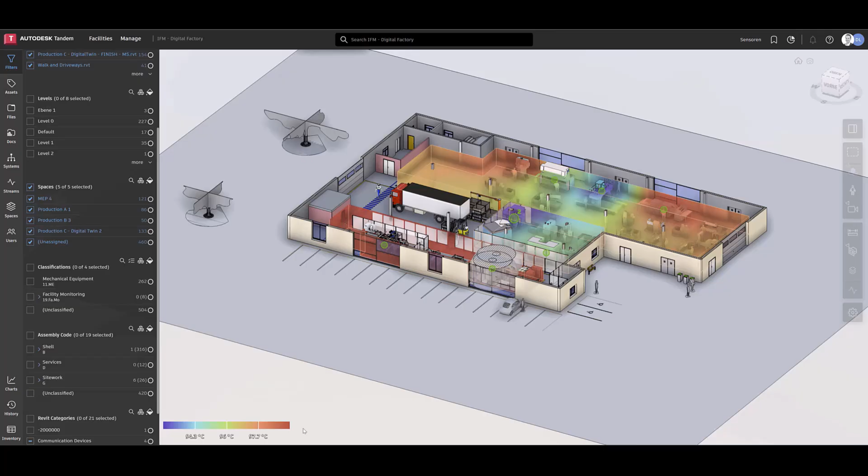This has to change, and we definitely need to change that by reducing money, by reducing rework, by reducing delays and so on. So the opportunity is to coordinate layout decisions across disciplines, to identify and resolve planning conflicts early, and to streamline handovers and approvals. And this can be done by aligning all stakeholders on a shared and real-time data model. Why does it matter? We talked about that.

We want to move you from working in fragmented processes to cross-functional collaboration. You can reduce delays and you can avoid rework and a lot of cost. It's your opportunity and responsibility to implement the digital transformation, to master the multiple challenges that we are facing these days, to stay relevant in the local or global markets, to stay attractive for new talents, and to save the future of your company.